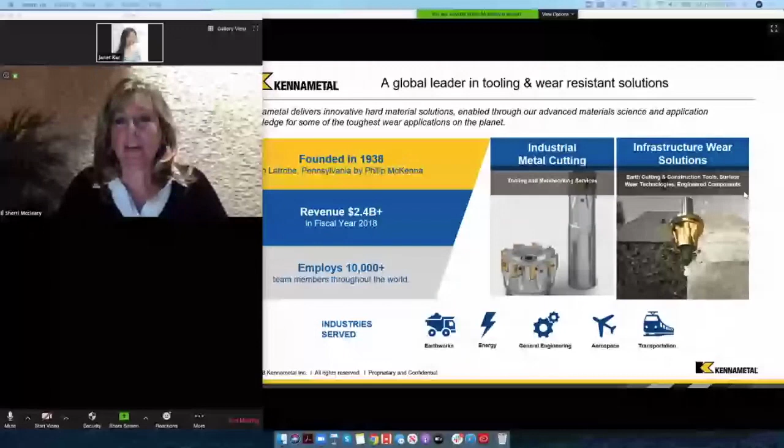The business groups within the company are our industrial metal cutting tools and our infrastructure businesses that include some of our wear solutions that I will be talking about today. And we serve a lot of major markets, including earthworks, energy, general engineering, aerospace, and transportation, among others.

So for starters, what do I mean by components and solutions that fall into what we call the wear category? These are products and materials that are in environments with very tough conditions. They're materials that are very hard and resistant to erosion, corrosion, wear, high temperatures.

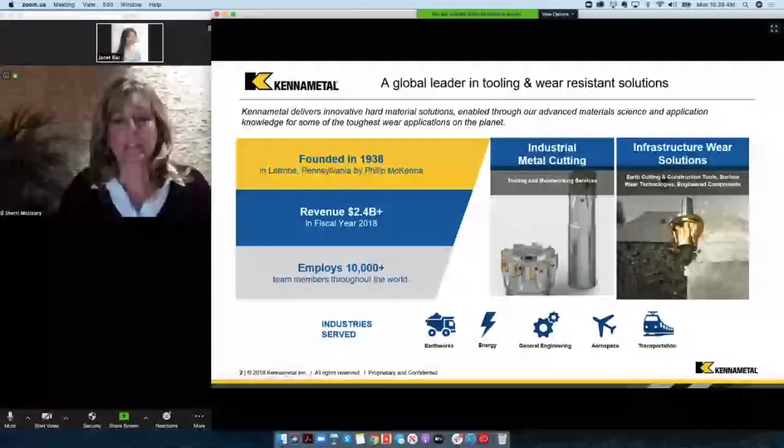Some of the typical applications include mining and earth cutting, oil and gas, power generation, construction, industrial tooling, as well as a lot of process industries, including processing of materials, food, and chemicals, anywhere where you may have aggressive, corrosive, or abrasive gases, liquids, or solids passing through a system.

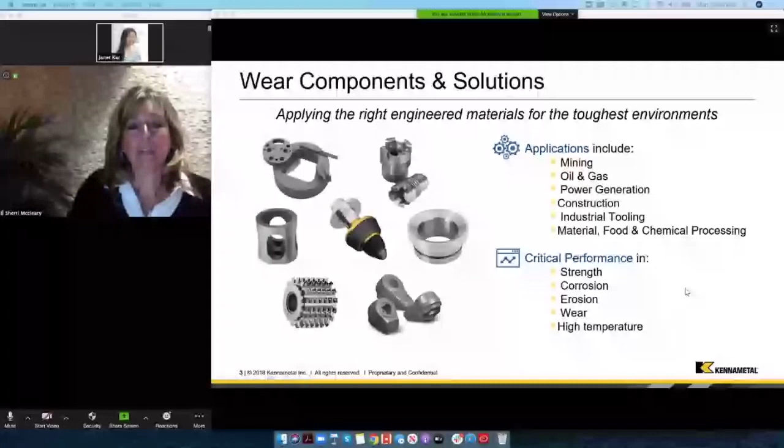So why additive manufacturing? All of the typical reasons that everyone's very familiar with as it relates to design optimization apply to wear components as well. We're often dealing with complex geometries, the need for customization, parts consolidation. It also enables the use of some materials where you can create different metallurgical properties, weight savings, and improved performance.

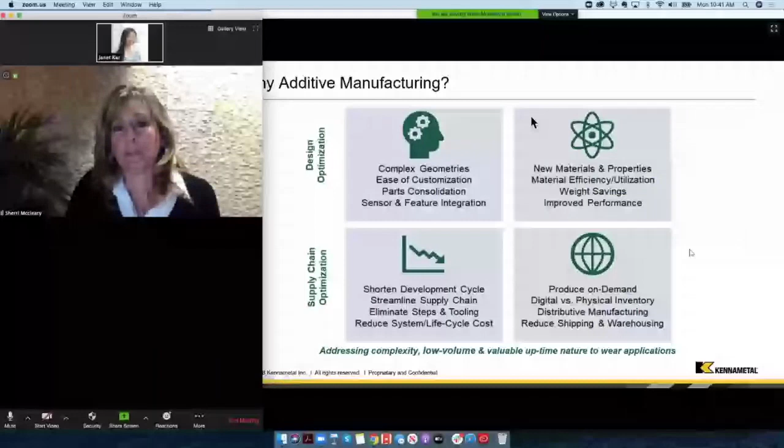But one of the big issues that additive addresses in wear components: by the very nature of the fact that they do wear, they are often replacement parts. The frequency of replacement is unpredictable at times, depending on what's passing through a given system. So supply chain benefits of additive are one of the key drivers for wear components.

The ability to shorten development cycles, streamline and compress the supply chain, and rapidly deliver parts can be very important. Downtime can be extremely costly. So things like printing on demand, digital inventory management, reducing shipping and warehousing, and carrying of physical inventory are very important to this market segment.

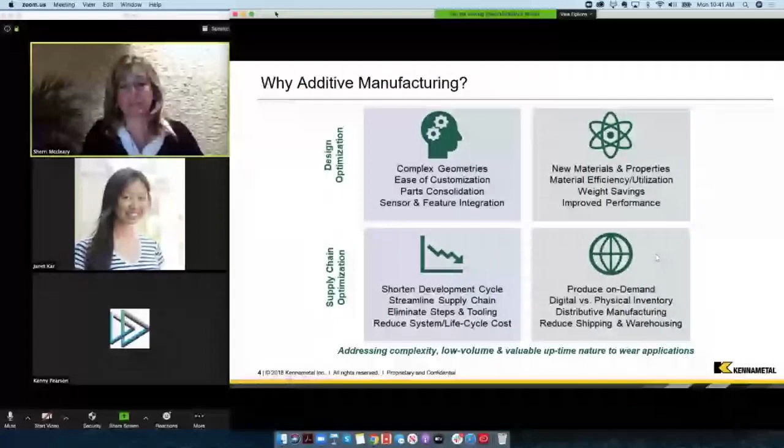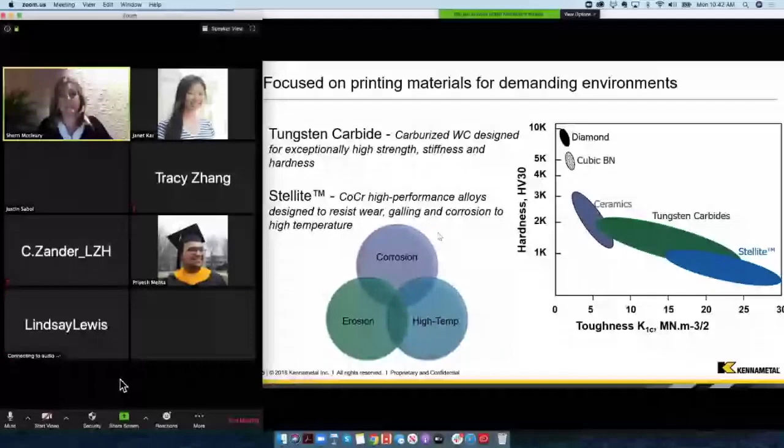So where are we focusing to deliver into these demanding markets? We have started with two material families for Kennametal, dating back to some of the first uses and development of tungsten carbide in the U.S. And also we are the developers and owners of the trademark for the Stellite materials, which are cobalt chrome. So these materials function in this space where corrosion, erosion, and high temperature overlap.

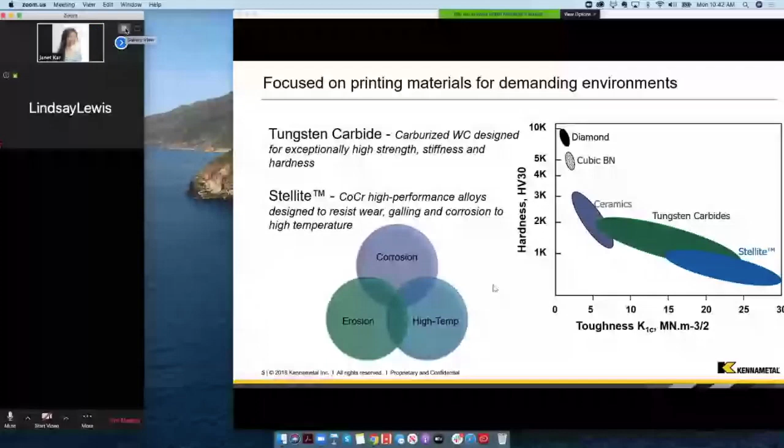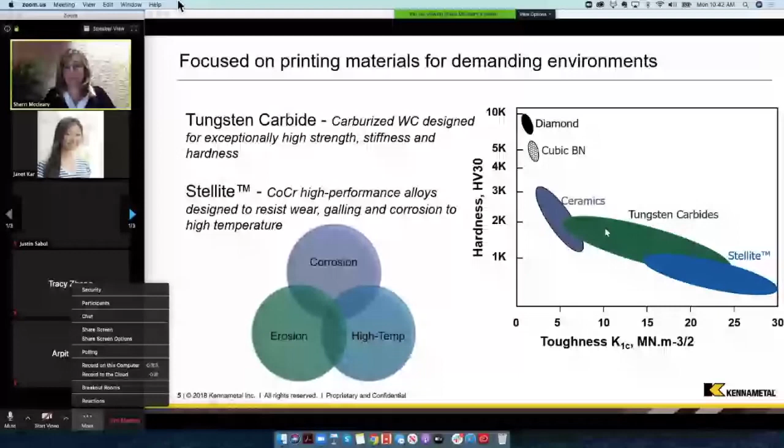And if you look at this material map of just a couple of key performance attributes for these types of materials, toughness on the x-axis, hardness on the y, you can see where tungsten carbide falls in the green, in the blue. There are several grades of tungsten carbide, several alloys in the Stellite family, and they're getting up there in the range of, in some cases, what you would get with ceramics. And so we're talking about very hard, very tough materials.

The Stellite is a cobalt chrome based material, and the tungsten carbide is basically a metal matrix composite where you have your tungsten carbide dispersed in a matrix of cobalt or cobalt in combination with other metallic materials in the matrix.

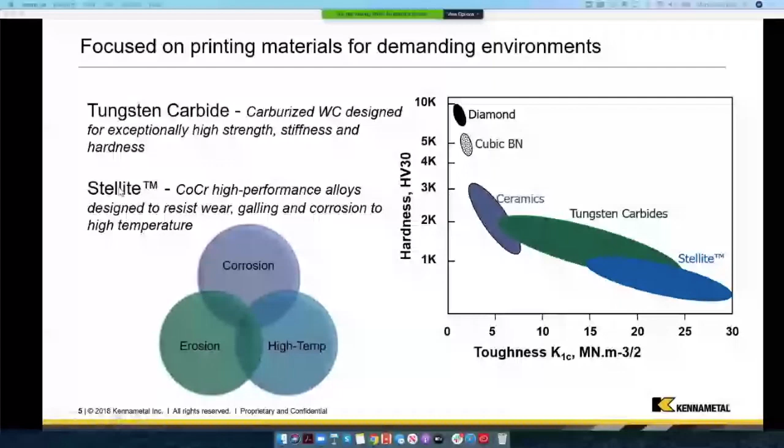So when we look at what it takes to complete the solutions for wear components, it's not unlike what you have in a lot of other segments, whether metal or plastics or otherwise. But in this case, we're managing the metal powder characterization and customizing that for additive to make it both more printable and to get the desired properties in the end.

We are doing prototyping and optimization of the design for manufacturing. And then we are printing production components for the wear markets and also focusing on post-print processing and finishing that would include, in this case, sintering or HIPing, as well as finish machining and grinding.

So what we bring specifically: we produce our own AM powders. As I said, we have long expertise in tungsten carbide, cobalt, as well as nickels. We are producing powders that are sold to others who are printing, but we're also customizing powders for the components that we're producing.

We work with customers on collaborative design to make sure that the component is designed for printing and post-print processing, prototyping of fully functional parts, and then we are moving to serial production using binder jet and laser powder bed systems for development of our powders.

We do hold some foundational IP on the printing of tungsten carbide and the development of our Stellite alloys. That gives us some differentiation and puts us in a unique position. With regard to post-print processing, this is very critical, as most who are doing metal printing realize.

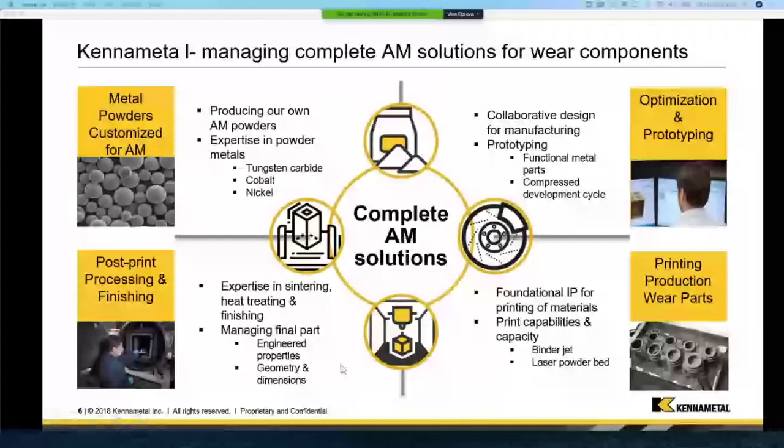So for our hard materials, as well as some of the stellites that we're currently printing, we are primarily focusing on binder jet technology. And as a brief description, with this technology, basically you have your powder reservoir or tank that's distributing that material into your build tank or your build box.

In your build box, layer by layer, you're putting down a very thin layer of your liquid binder on the powder to create your bound layer of powder, where basically your binder is gluing that powder together layer by layer, and what you end up with is a green part that then has to go through debinding, burning off of that binder, and sintering to your final metallurgical properties.

In the sintering operation, as you go up in heat, you get consolidation and densification of your component. We achieve 98 to close to 100% density just following liquid phase sintering, and then we can get to a full 100% densification, if not through sintering, by a follow-on HIPing operation.

Some of the advantages with the binder jet technology is the fact that it's the only reliable technology at this point for printing of very hard materials like tungsten carbide. It also does not require that you build any supports in your print bed. You can use the entire volume of the build box and build all the way out to the edges. There's no heat or shield gas required in the printing operation.

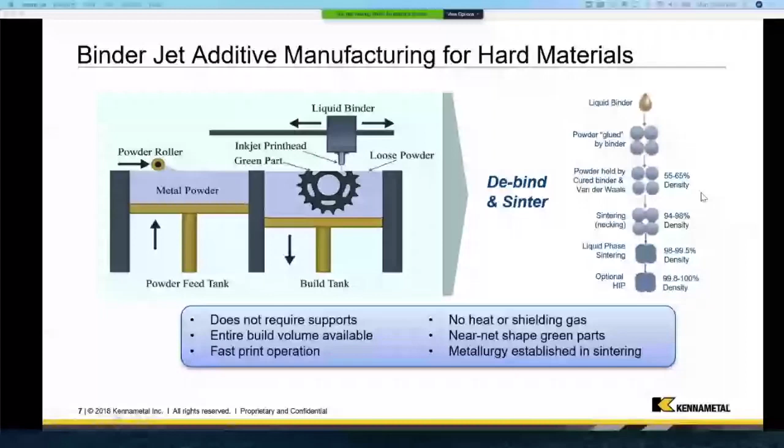So as we look at how we manage through this process, there are a lot of key input variables around the powders, the part design, the printing, the curing, the debinding and sintering that are all responsible for and interdependent to achieve your key output variables, from the ability to print, flow, and sinter all the way through to the final density, grain size, and properties of your part.

So it is a complex management and understanding of the science and interdependence between all of these key input variables to make sure that you are managing what you get coming out on the other side.

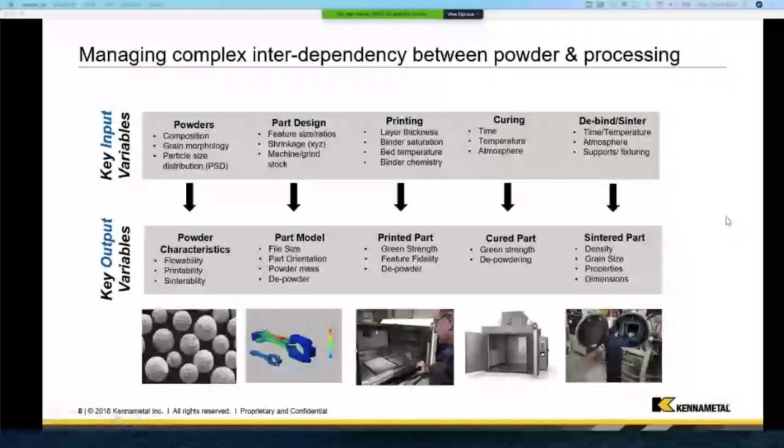So when we look at what we're achieving, these are two of the Kennametal materials that we have refined and customized for 3D printing in the binder jet technology. They are Stellite AMK, which is our additive-specific Stellite 6.

Stellite 6 is a cobalt chrome alloy that has dispersed carbides that make it a very high wear cobalt alloy. It's one of the most widely used cobalt alloys, particularly in wear applications. It brings a good balance of wear resistance, corrosion resistance, and property retention up to about 500 C.

And I show a little spider diagram here. I had to kind of normalize these so I could fit everything on at the different scales. But what it basically shows you is that when we compare what we can get with additive manufacturing to an investment cast Stellite 6, we are basically overlaying with the same properties in ultimate tensile and tensile at temperature, elongation, yield, density, hardness.

And we actually have this volume loss in the additive, where we have a little bit less volume loss. They're also very analogous to what you would typically see in a cast structure with Stellite 6.

With our Kennametal tungsten carbides, we have KAC89. This is a cemented tungsten carbide that has a 17% cobalt matrix. Again, a good balance of wear and hardness that you would expect for tungsten carbide, but with the 17% matrix, it's a tougher material. And again, it directly overlays with what we see with respect to the three primary properties that are always measured, which are transverse rupture strength, density, and hardness.

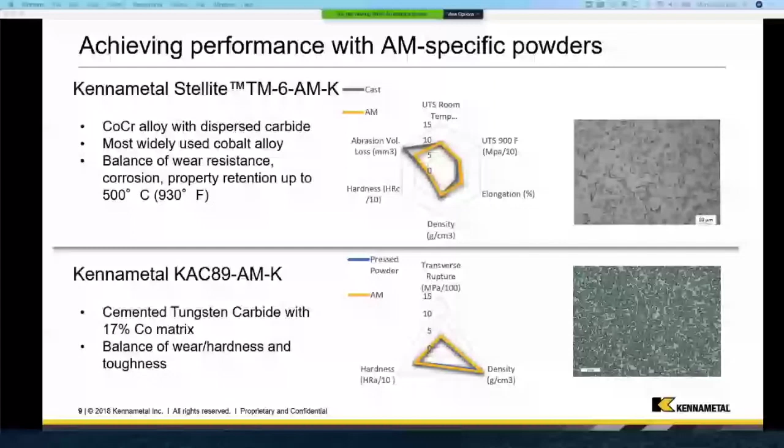So when we look at what we can achieve as far as geometries, this is really just a small sample of the many parts that we have been producing that range everywhere from some very small components that you see in the lower left-hand corner that are relatively simple to some very large and complex parts that you see in the upper right-hand corner, including one of our largest, this concept for a drill head that's solid at our 17%. This part is roughly the size of a soccer ball. It weighs about 50 to 60 pounds or 23 to 27 kilograms, so a large, heavy part.

And this is one of our larger stellite parts. This is a flow control stack that measures about 12 inches tall. And if you look, this is a cross section of it. While it doesn't look particularly interesting on the outside, one of the things that we are leveraging with additive a lot with wear components is the ability to do very complex internal flow channels. And you can see that with the cross section here taken from this part. And you can see the flow channels in a section of this part as well.

So in a lot of cases, as you can imagine, in process industries, you're flowing materials, products through these systems where you may be trying to control the pressure, the flow of a liquid or gas, or you may be just running it through your process operations and you need wear resistance. And additive is allowing some very unique concepts around how to manage flow control in some of these components.

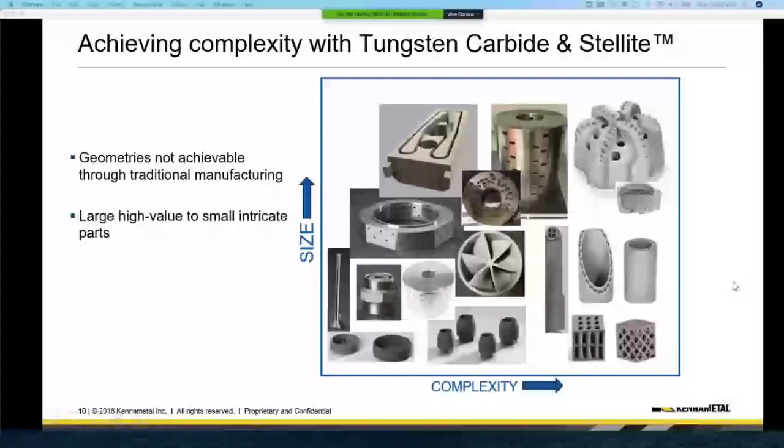And if you can see this part, which it may be a little difficult to see on camera, but around the center here, this was a region of the component where tolerances were not critical, and you can see that's a little rougher. That's the as printed surface, versus fit up and threading on either side of that did require final machining. And again, the interior is not machined, it's as printed. So again, post machining is typically required for some of these complex shapes, but you really need to stop and think about what surfaces are really critical and require that kind of dimensional control versus which surfaces you can live with as printed, because it can take a lot of cost and time out of the operation.

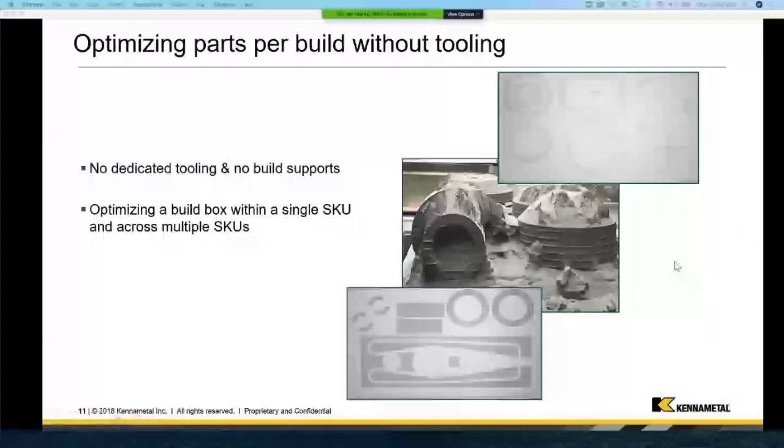The real advantages of additive is to figure out how you use that ability most efficiently. So we also find the opportunity to really optimize with our customers, not only the ability to do production-ready wear components and deliver the same performance that they're accustomed to in traditional flow paths, but to really serve our customers with new business models. So we think about what does additive bring? Yes, it brings the ability to do complex shapes. Yes, it brings the ability to create some really differentiated materials and designs,

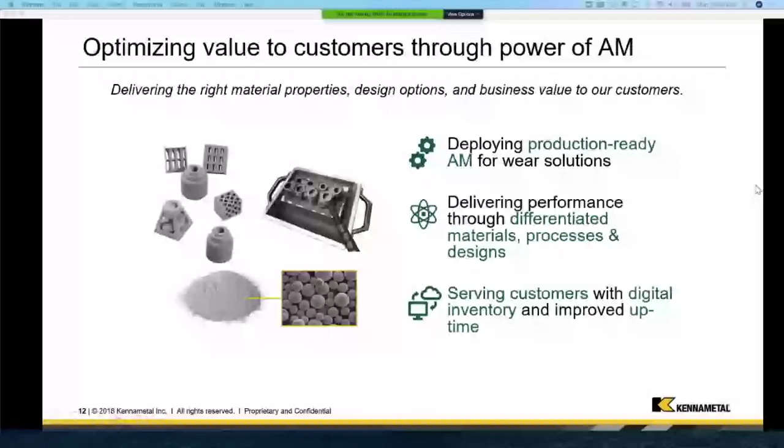but the ability to serve our customers with things like digital inventory, improving uptime, reducing cycle times for development, being able to reiterate and try things quickly, get components in the field and trialed quickly is proving to be one of the greatest value propositions of additive when we talk about wear components.